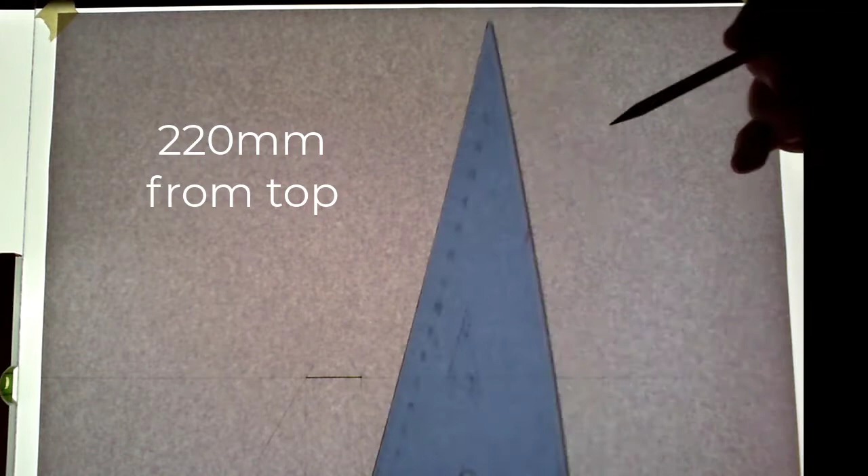So I started off by moving down 220 millimeters from the top of the sheet, and in 150 millimeters from the left hand side to this point here of the plan. Now each side on the hexagon is going to be 30 millimeters. So I drew in this line here 30 millimeters as part of the plan,

and I've drawn down a 60-degree angle and a 60-degree angle, and I've used a compass to strike off 30 millimeters and 30 millimeters. Okay, I then bring the 2 points down vertically, and then I strike again off the 30 millimeters and 30 millimeters. Okay, so that will give me the outline of the hexagon on plan, which I'm going to just finish drawing in.

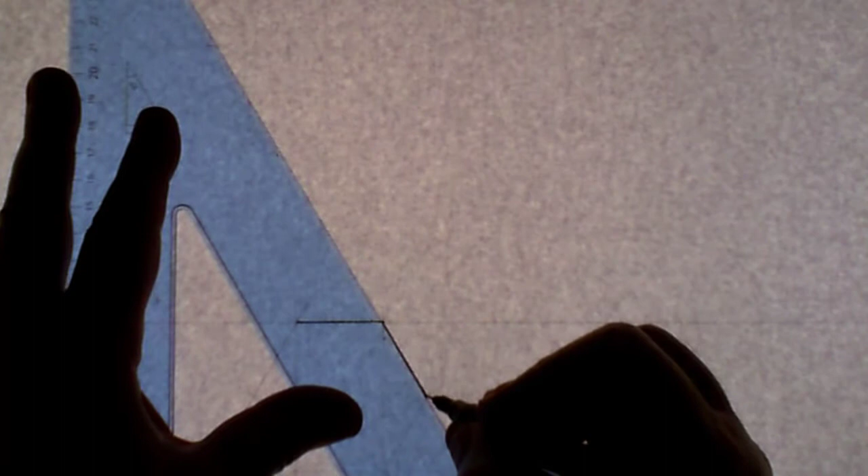So again, just to check that, so 1, 2, 3, all points correlating, 1, 2, and then 3. So a perfect hexagon drawn in there, and I'm going to now proceed to draw it in using ink. So what we have now is the hexagon on plan.

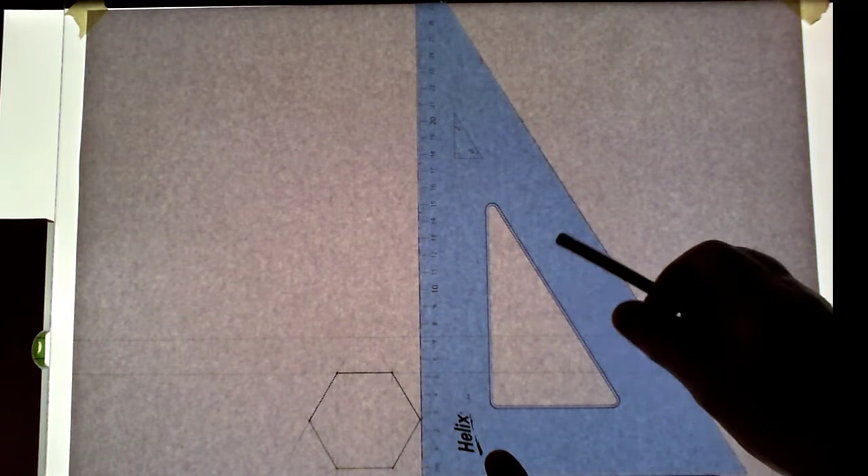So what I'm going to do now is I'm going to bring those points from plan up onto an elevation. So I'm going to space the XY line of the elevation, the ground line of the elevation, 20 millimeters above the plan. And I'm going to draw my XY line, the ground line of the elevation. I'm now going to proceed to bring up all of the points from the plan to form the elevation.

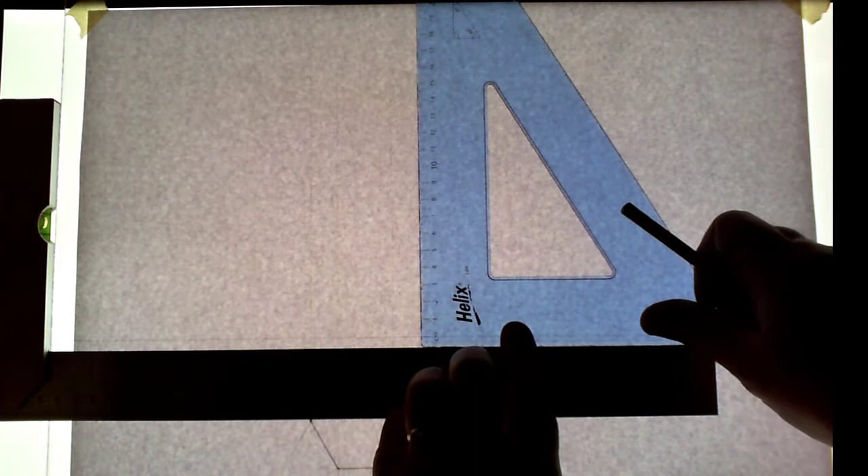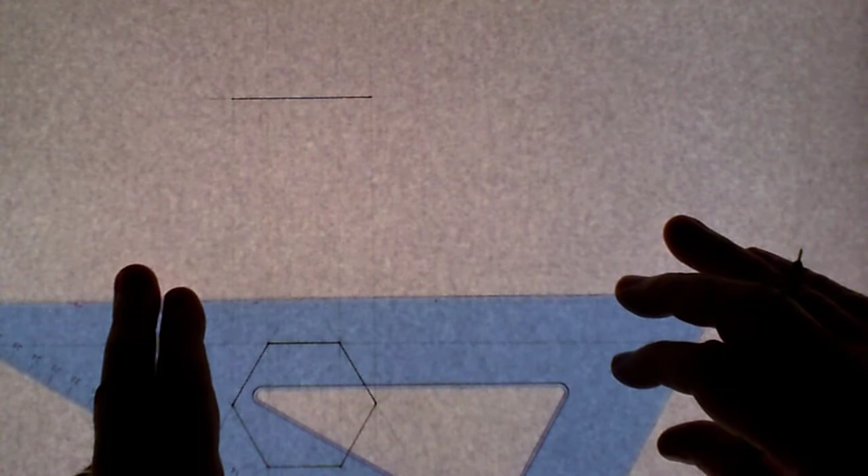Now the height of the hexagonal prism is 90 millimeters. Measure up 90, and I proceed to draw the top of the prism. Now I have the elevation drawn in now, and I'm going to ink it in. So the top of the elevation, bottom of the elevation, and the vertical lines of the elevation.

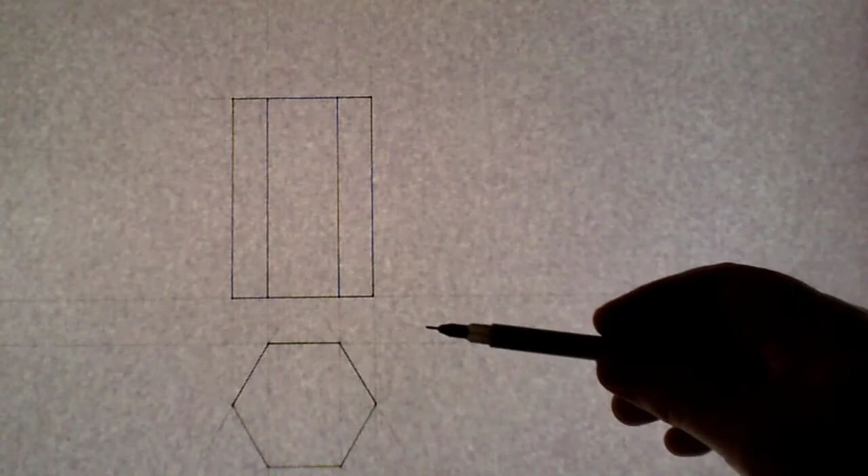So now we have the elevation and the plan of the hexagonal prism. Now what I'm going to proceed to do is to draw in the end views. So the end view on the right hand side will be looking in from the left. The end view on the left hand side will be looking in from the right. So I do that by simply drawing my points up at 45 degrees from the plan.

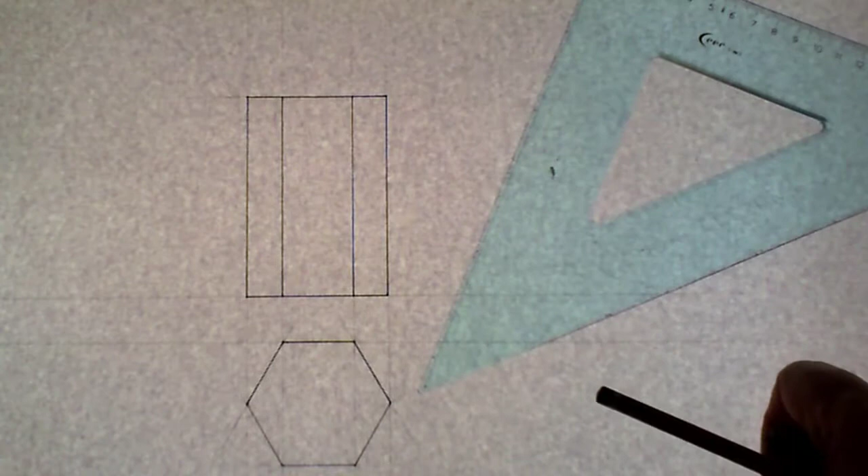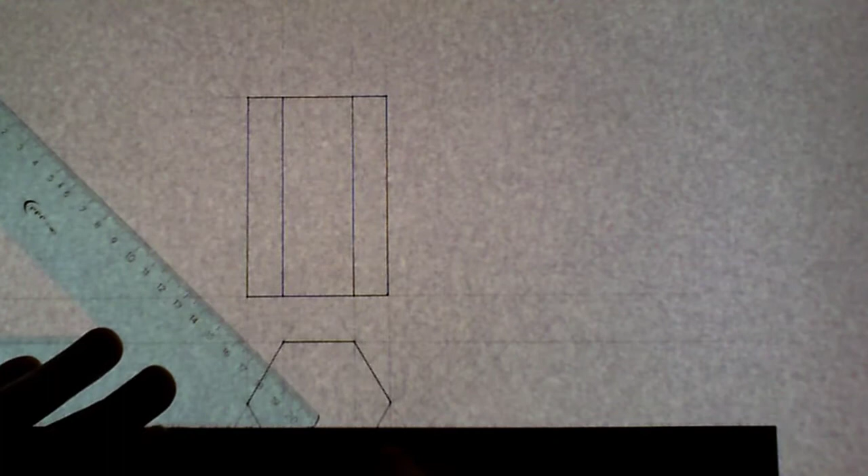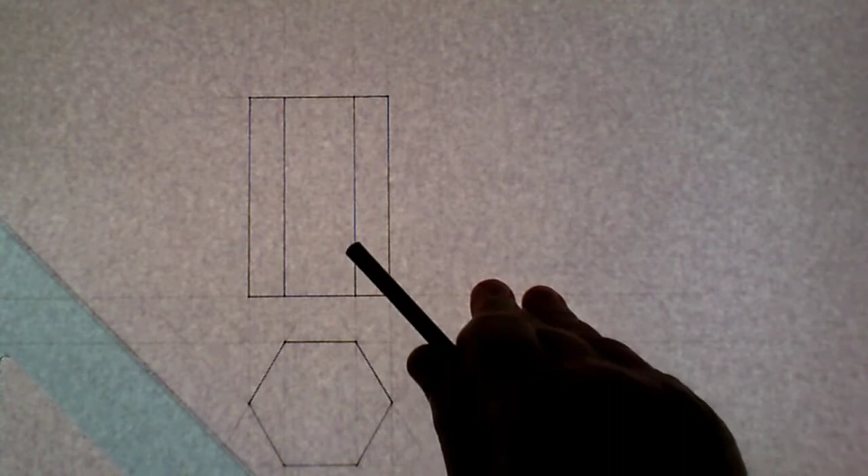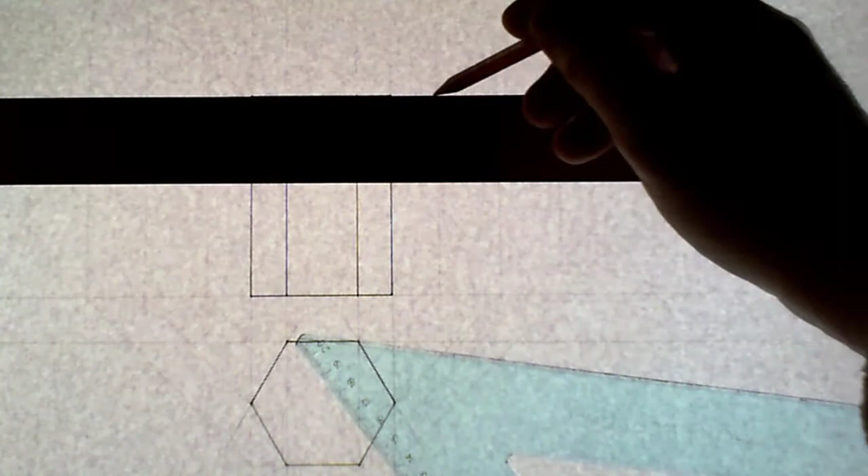Wrong point, that point there. Then extend those points up vertically for the side views. And I bring my height across from the elevation. Now, I'm going to proceed to draw in the construction lines in red.

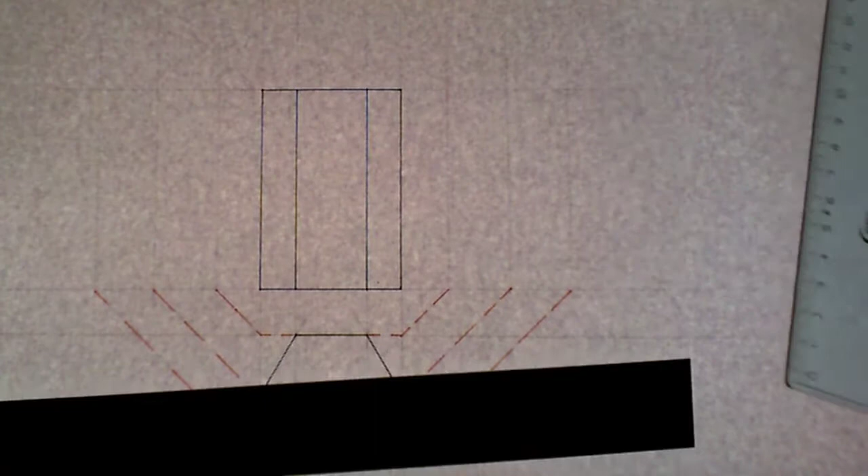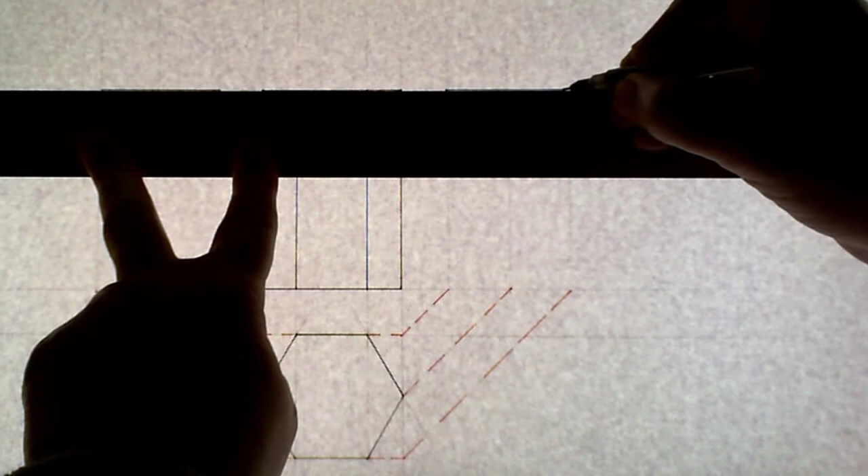Okay, so now I'm going to draw in the two end views. And now the vertical lines.

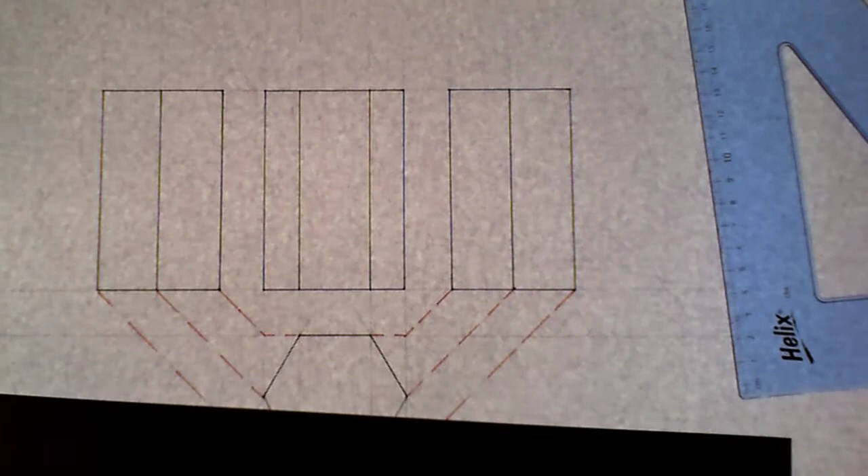So now what we have is the elevation, the plan, the end view looking in from the left hand side, and the end view looking in from the right hand side.

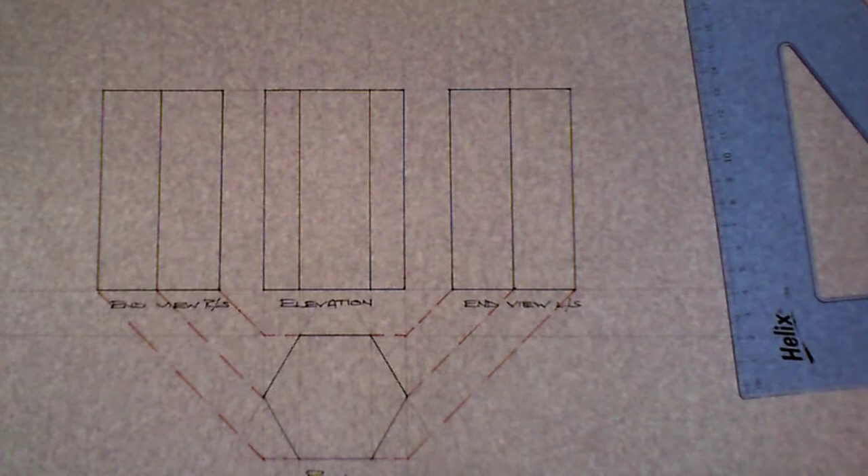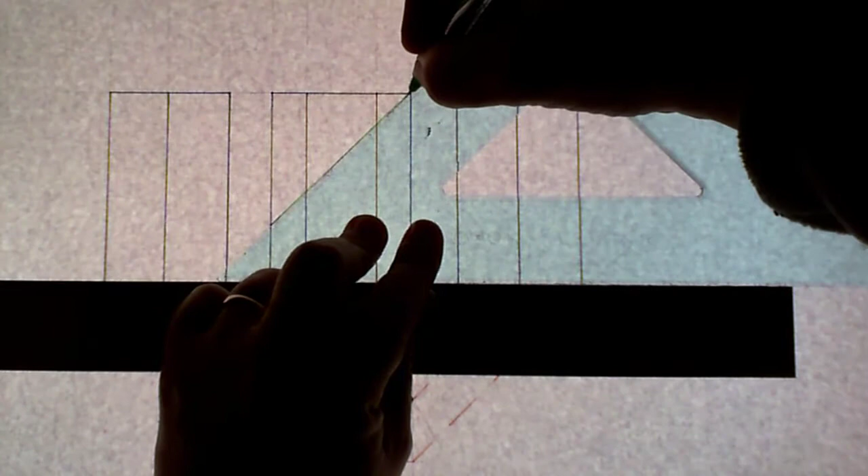Okay, so what we do next is insert a cut. So the cut that I'm going to insert will be at 45 degrees. And I'm going to move up 30 millimeters on the left hand side, and the cut will be at 45 degrees. So that's indicating the cut now.

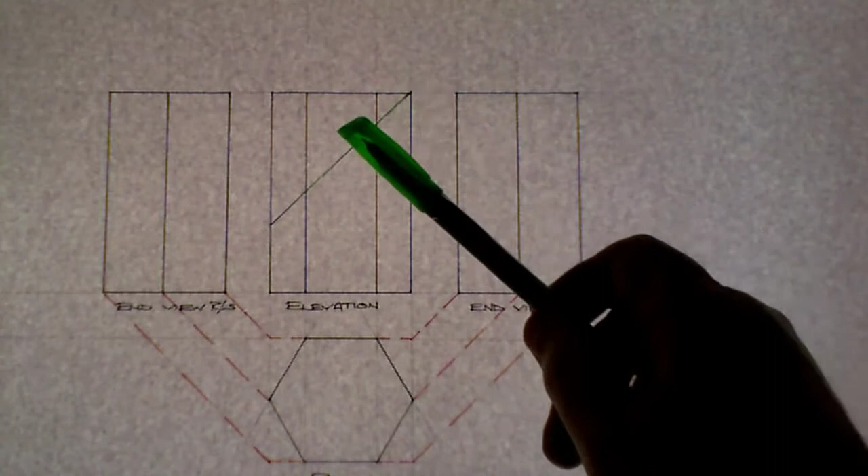Now, how does that cut impose itself on the other views? So first of all, with regards to the plan, it does not affect the plan because both points of the cut, the left hand side point and the top point, are on the sides. Okay, it does not cut through the top. So because these 2 points of the cut are on the sides, you have a full hexagon as a cut on plan.

So it doesn't impose any other line on the plan because the 2 extreme points of the cut go through the sides. However, it does affect the end views. So the points in the end view, if I bring the points across on the end view. So again, I'll just simply use a pencil first. So where that cut, that 45 degree line, cuts the different points.

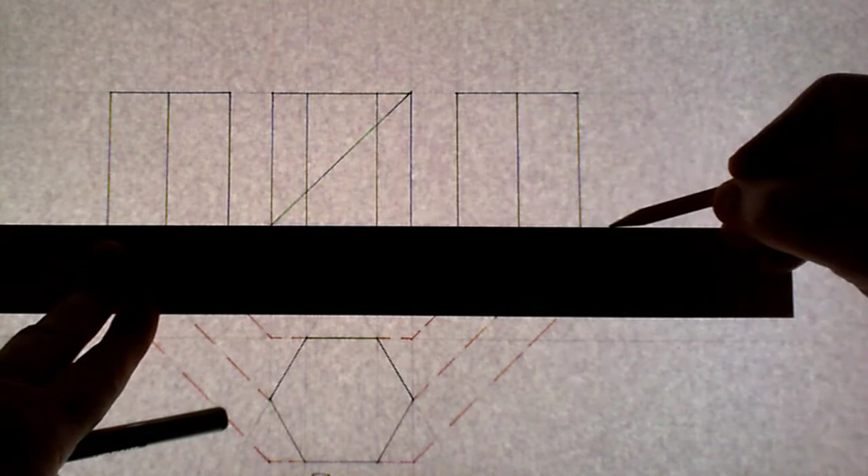So here, 1, 2, 3. Yeah, so I'm looking in this way. Okay, so the first point I see is this bottom point.

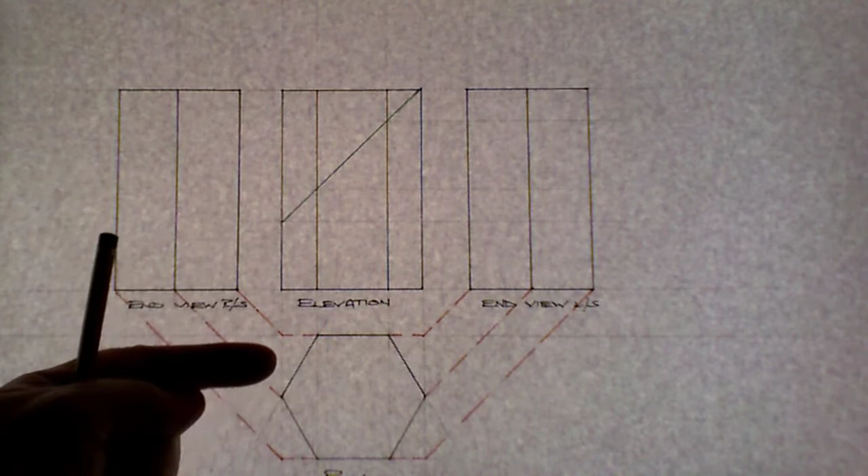Okay, so that's my first point, 1. Right? The next point is on these 2 points, the 2 sides. So it's here and here. The next one again is on the 2 sides, here and here. And then the top point, top corner, which is here.

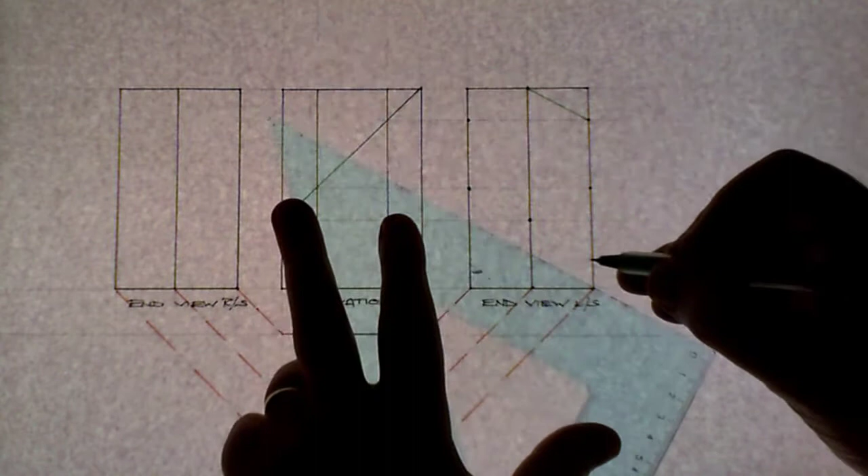So again, if I impose that as a cut, very simply draw it in, and they'll be hard lines because I'll be seeing the cut head on. So point to point here, 1, point to point here, point to point here, point to point here.

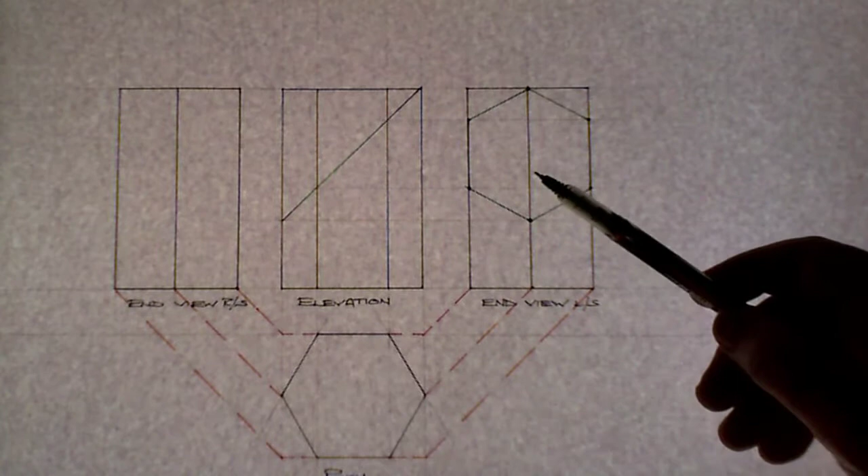So I just put the green line on the inside here just to indicate that this is the cut. So that's the cut on elevation. It doesn't affect the plan. You see the same shape with regards to the plan. The cut on the side view on the right hand side, which is looking in from the left, looking into the cut, the green line indicates here how the cut imposes itself on the end view.

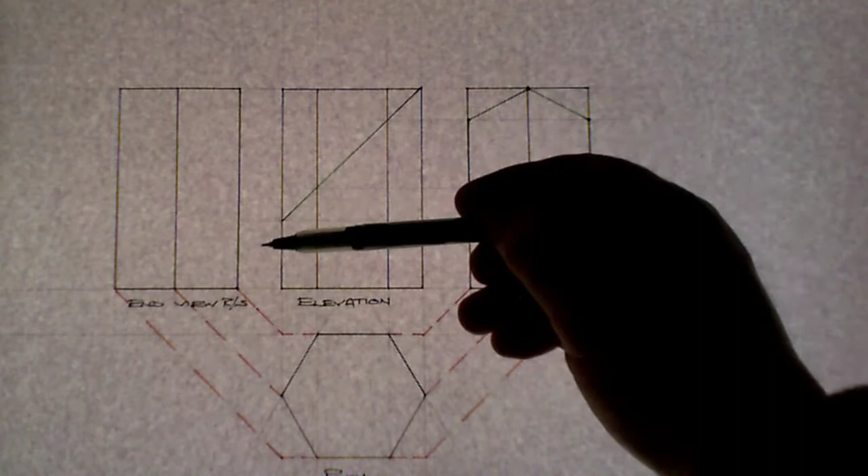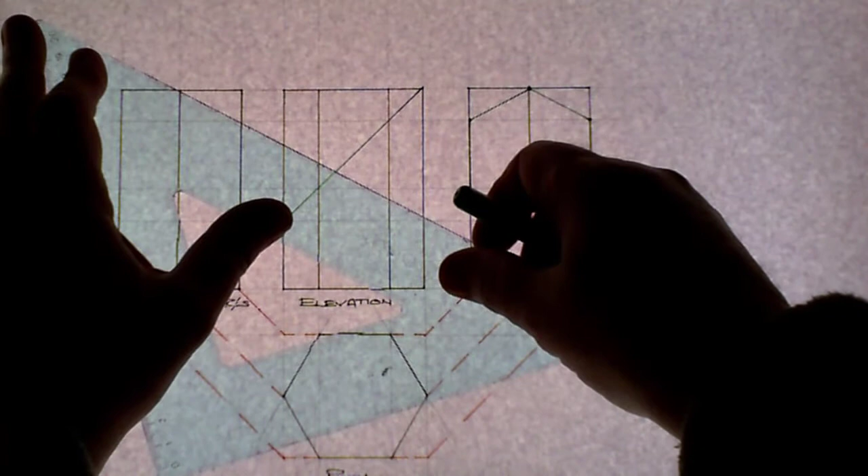Okay, on the other side, on the other end view, I'm looking in this way from the right hand side. Okay, so I'm not going to see the cut directly, but what I do is I pick up the points, bring them across and draw in the shape of the cut as a broken line. So again, I bring across the points of the cut. So again, instead of having a full hard line, what I do is I draw in a broken line. A broken line indicates what is there but you cannot see.

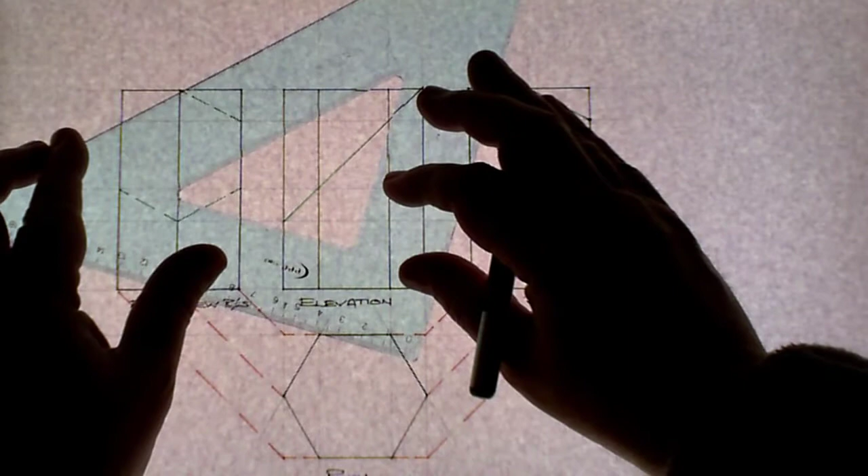Now, so we have the elevation, plan, end view looking in from the left hand side, end view looking in from the right hand side. Now I'm going to shade in the cut surface. So the green line is the cut surface. So on the plan, this is going to be the cut surface here. So I'm going to shade it in. And this is going to be the cut surface over here.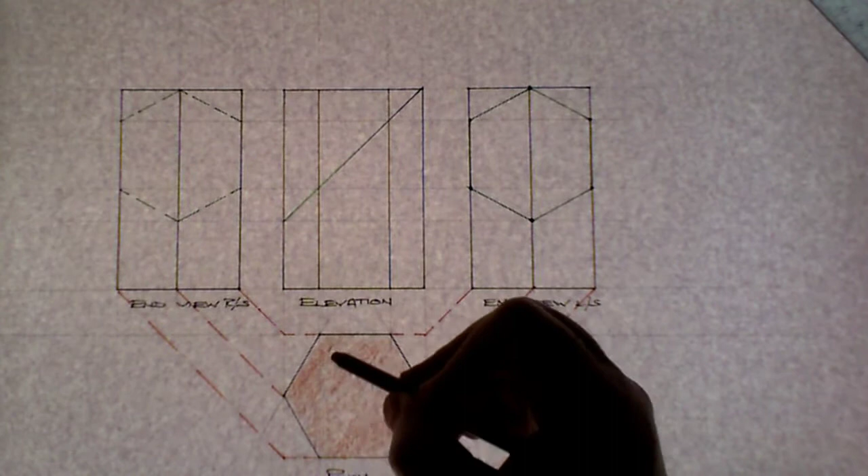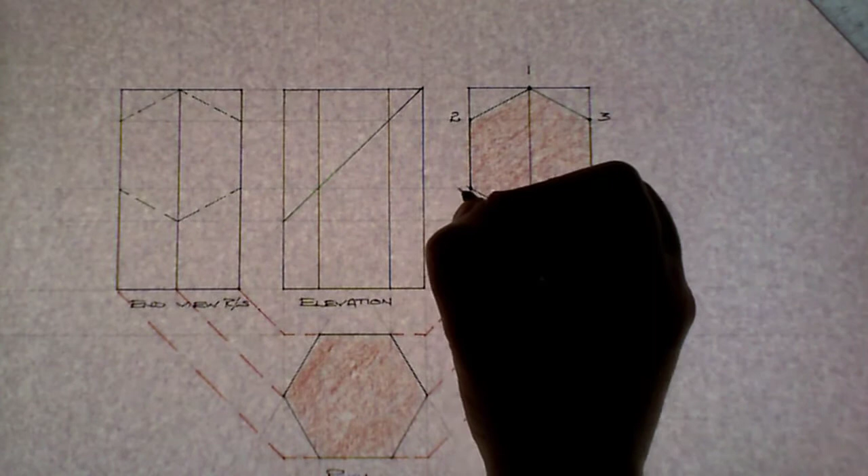So, the cut surface on plan, cut surface on elevation as a line, and cut surface on this side view looking in on the elevation from the left hand side. So the next thing I can do, just for clarity, I can index the different points. So very simply, if I index it on plan here, so I can list this as point 1, point 2, point 3, point 4, 5, and 6.

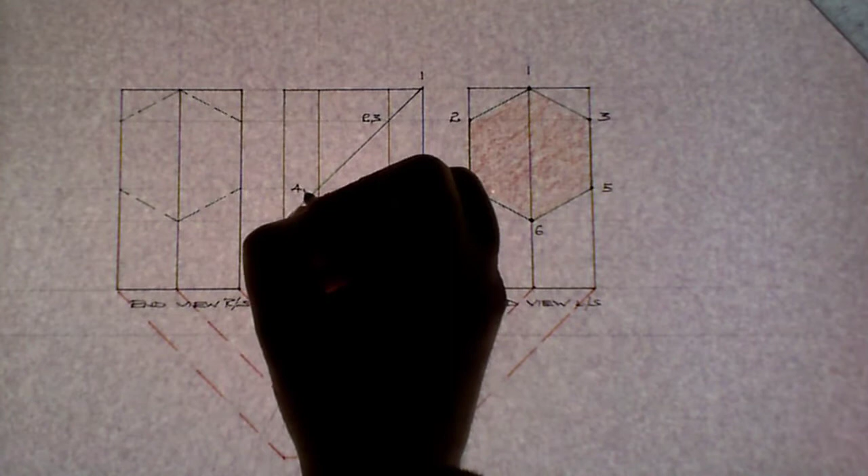Now again, if I'm looking at it in this instance here on the line, I have point 1 on the elevation, point 2 and 3 is the same point here, and then point 4 and point 5 is this point here, and point 6 is here. Now, on the plan, I have point 6, again looking at this here, I have point 4 and point 5, then I have point 2 and point 3, and then I have point 1. Okay, so that's the indexing done with regards to the elevation, the plan, and the end view on the right hand side looking in from the left.

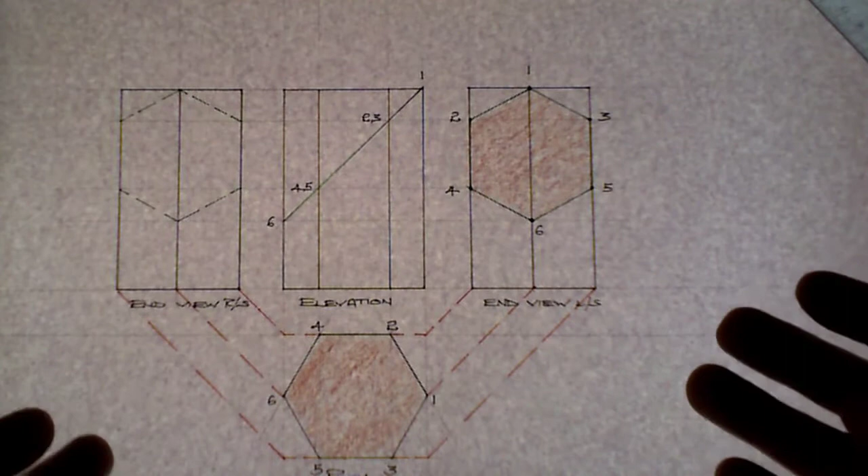Okay, now what I want to do is I can see how the cut has imposed itself on the different views, but what I have here with regards to the elevation, the plan, and the side view, I have the cut imposed, but I do not have the true shape of the cut. Now I can find out the true shape in a number of different ways. So I'm going to show you the different ways you can develop the true shape of the cut surface.

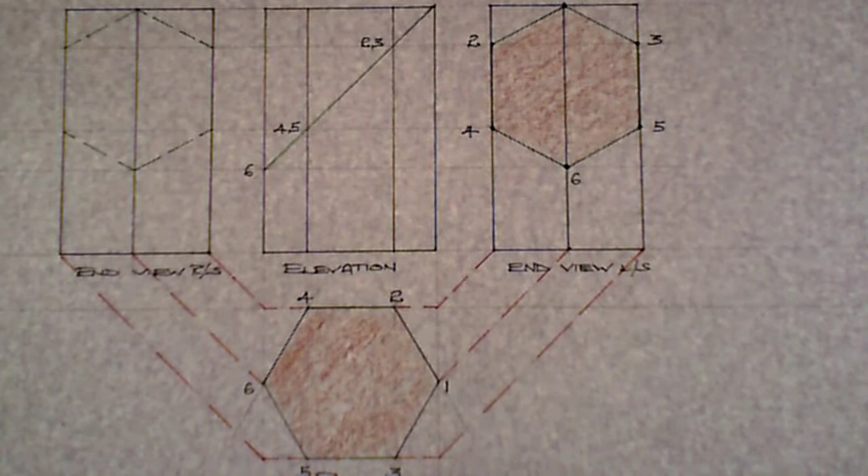First of all, first way of doing it, I know that the cut is at 45 degrees. Okay, so what I'm going to do very simply is draw a 45-degree line on this side here. So anywhere, I'm just going to impose a 45-degree line anywhere along here. So that's the 45-degree line. Now I'm going to draw that in red. Now what that line is going to represent, if I put that line in on plan, it represents this line here.

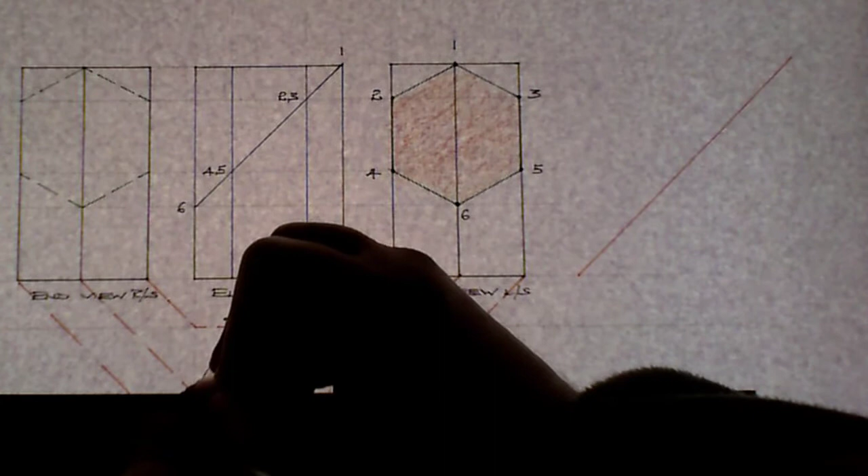It's a center line. Center line. And this here is going to be a center line. Okay? Now what I'm going to do is bring across the points. So I'm going to bring across the points to that 45-degree line, which I've just drawn in. So instead of using that, I'll use the set square, and I'm just going to bring across the points from the top of the view and use this point in order to keep it square, right?

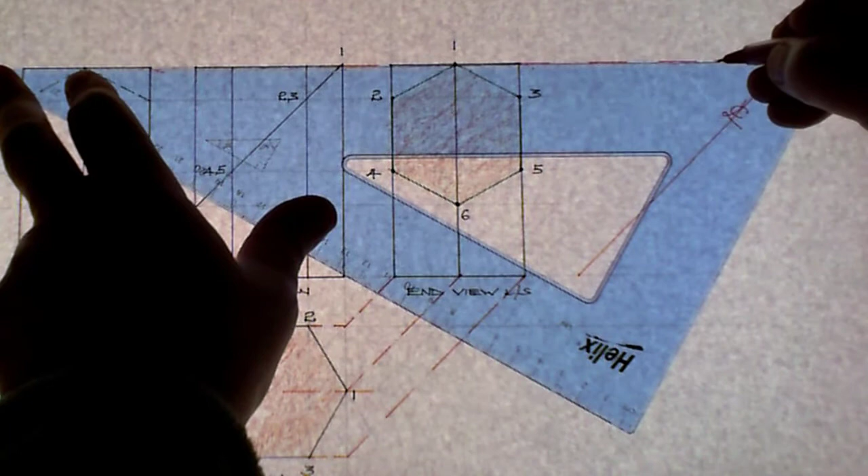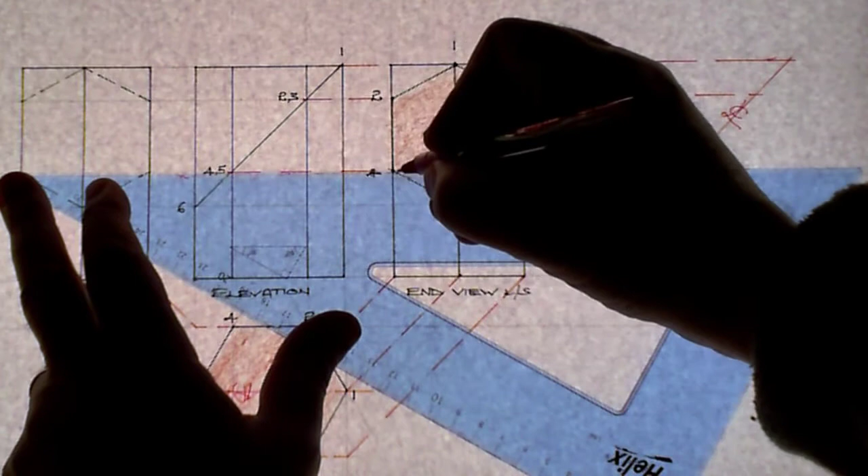So bring this point across, next one, next one, so I have each of those points, point 1, 2, 3, 4, 5 and 6 established on this center line here.

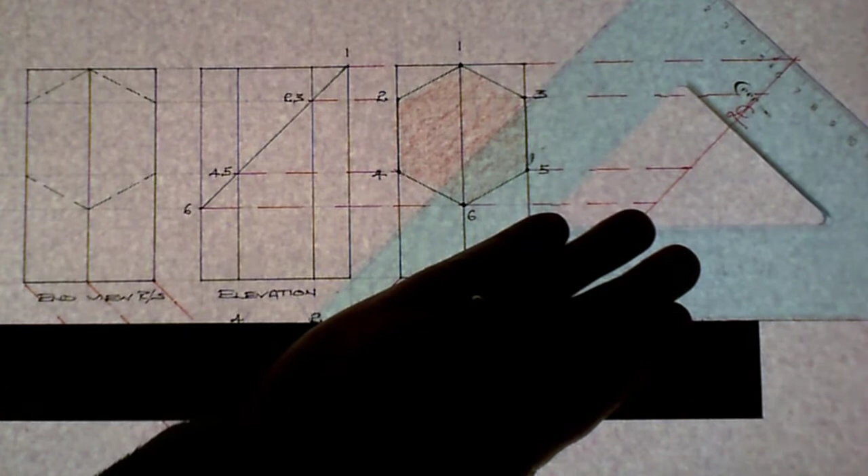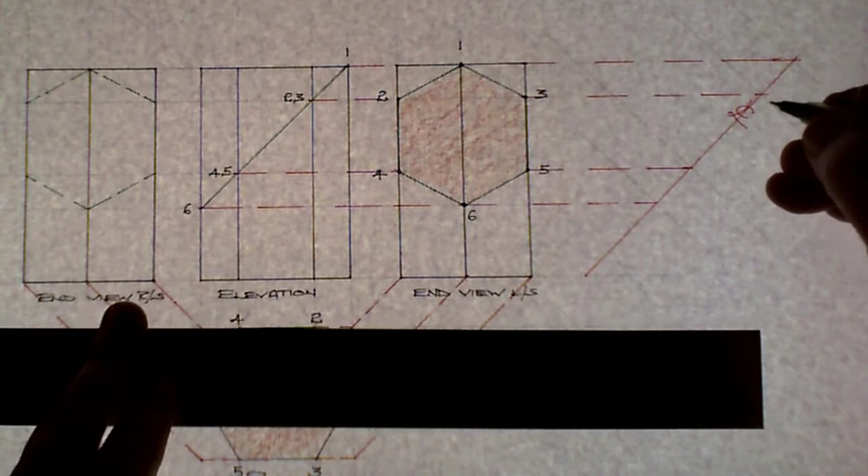Now what I'm going to do is draw a 90-degree line across from where those points hit the 45-degree line. So I'm going to use the pencil here. So top point, number 1, number 2 and 3, number 4 and 5, and number 6. Okay. So point 1 and point 6 will be on the center lines. This is the center line here on the plan.

The center line, if I put the center line in on the end view again, okay, I will use red. The center line is this line here. So that's the center line here. So I already have point 1 and point 6. They are on the center line. Point 1 and point 6. So I'll indicate that here, put it in green. Point 1 and point 6 are already established.

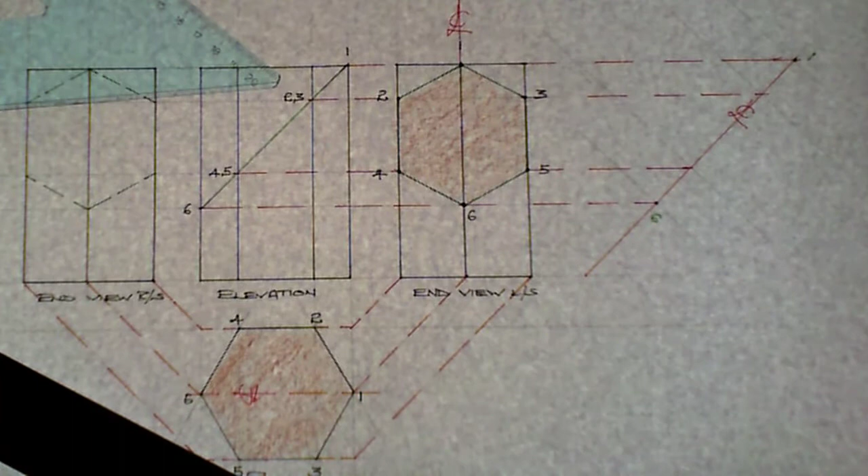Now what I'll do is simply get my widths. I can do it on both the plan and the end view. So the next point on the center line here, I put my compass, okay, and then I establish the width, right? These are the true widths on the end view, 2, 3, but it's also the same here on plan, same distance, 2, 3, center line, same. So I'm on the center line here, and I simply mark off what is going to be number 2 and number 3. Okay, it's the same width for center line to 4 and 5.

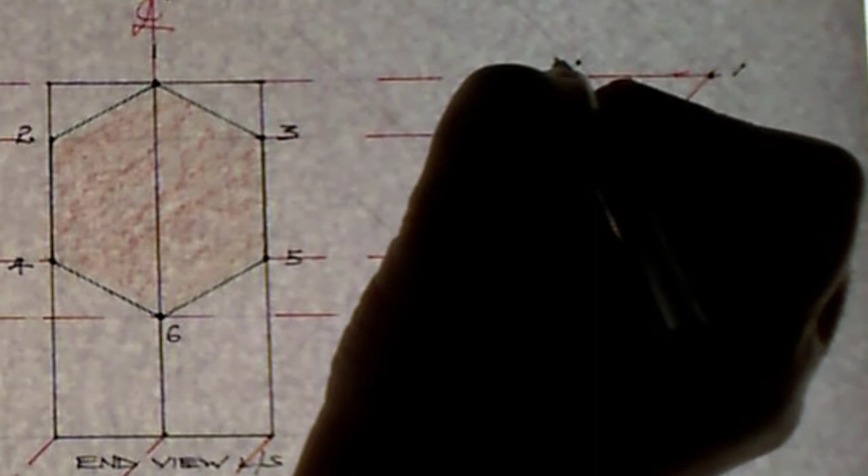Likewise on plan here, 4 and 5. Again, center line here, put it around, that's 4 and 5. So I'm going to mark those points again with a green marker. So again, I have two indicators here, point 2, point 3, point 4, and point 5. Now if I connect those points up, I have the true shape of the cut surface.

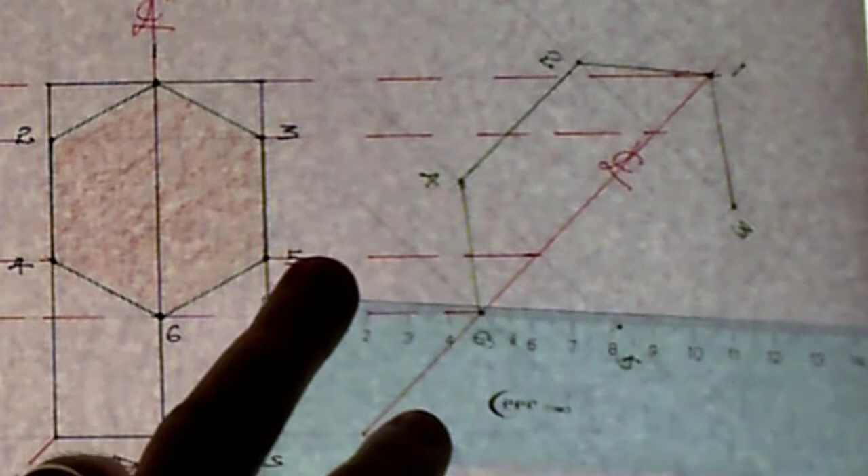So point 1, point 3 here. One to 2, 2 to 4, 4 to 6, 6 to 5, and 3 to 5. Okay, so that indicates now the true shape here, true shape of the cut surface.

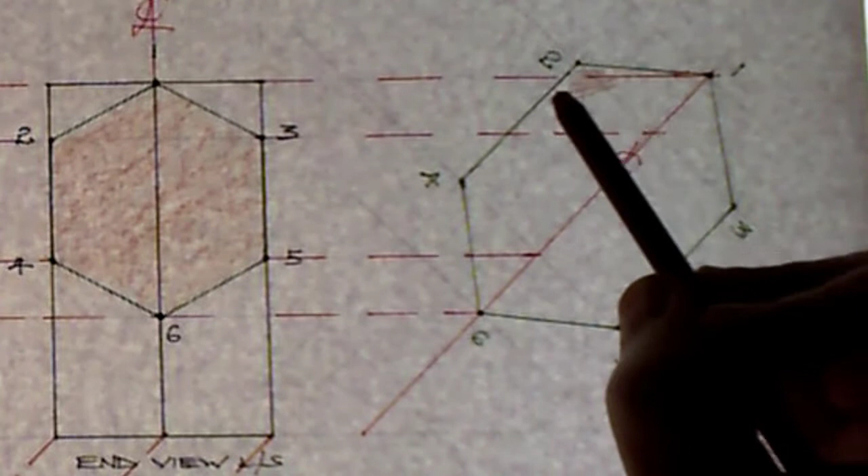So in effect what I'm using here is a swivel point. So on the cut surface I have the true length here on the elevation, okay, but I don't have on the side view or on the plan the true shape, because when I'm looking in at the end view I'm seeing this 45-degree inclined cut, but I'm looking at it on a vertical, not on the 45 as a true length.

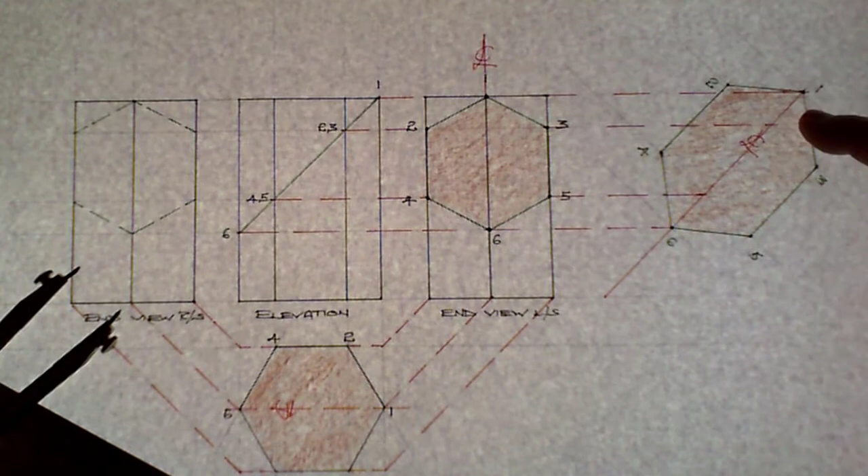So what I'm doing is I'm simply amalgamating two pieces of information. The true length line of the cut on the center line here, so that there is the true length of this line, okay, and I'm using then the true widths established from either the end view or the plan, and I'm bringing them off the center line and establishing my different points on the cut surface. So that's the true shape of the cut surface. That's one way of doing it.

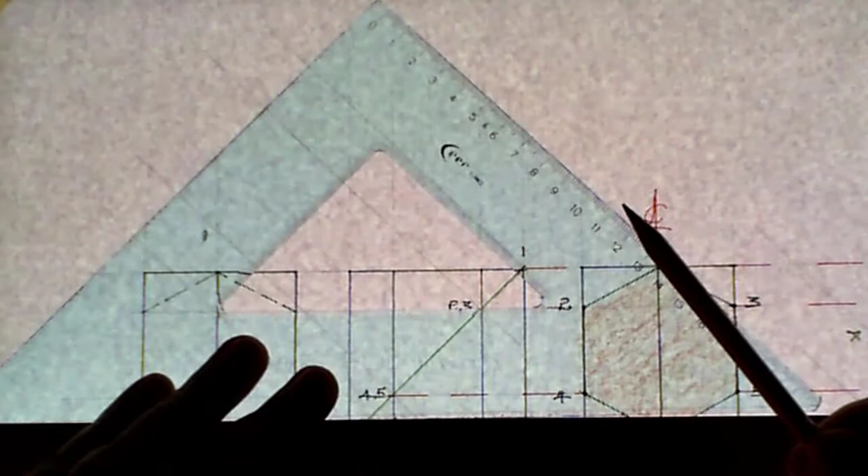Another way of doing it, again, simply what you're looking at is the 45-degree line here, because that's the angle of the cut. So in this instance, I'm simply going to bring off from the cut surface on elevation the points at 90 degrees to the cut surface. So that's just a simple return of 45 degrees. Okay. Now, in this instance, I'm putting the center line in a position whereby I can draw this comfortably and accurately.

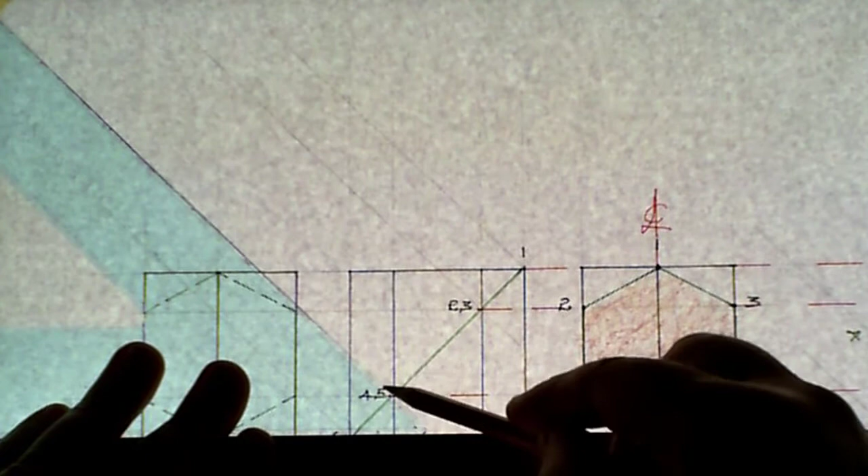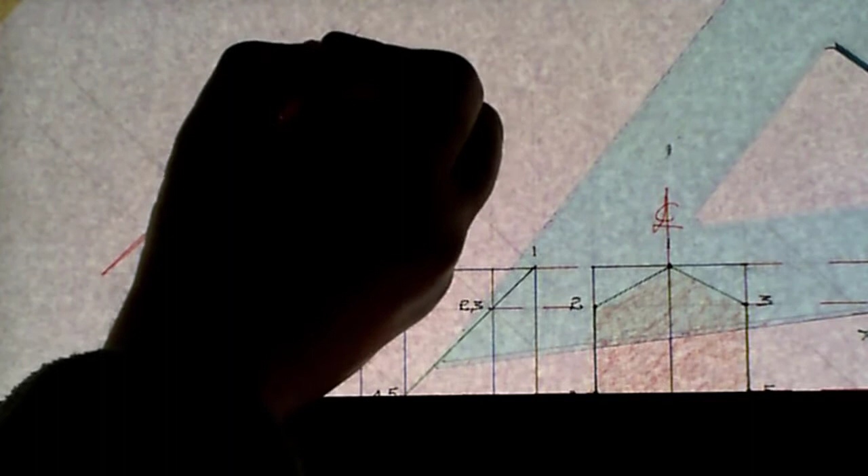Okay, so I draw again what's going to be my center line. I'm going to indicate this, again, in red. So that's at 45 degrees. It's going to run parallel with the cut. Okay, so that's my center line here. And on the center line, I already have established point 1 and point 6, because they are on the center line. This here is point 1, this here is point 6.

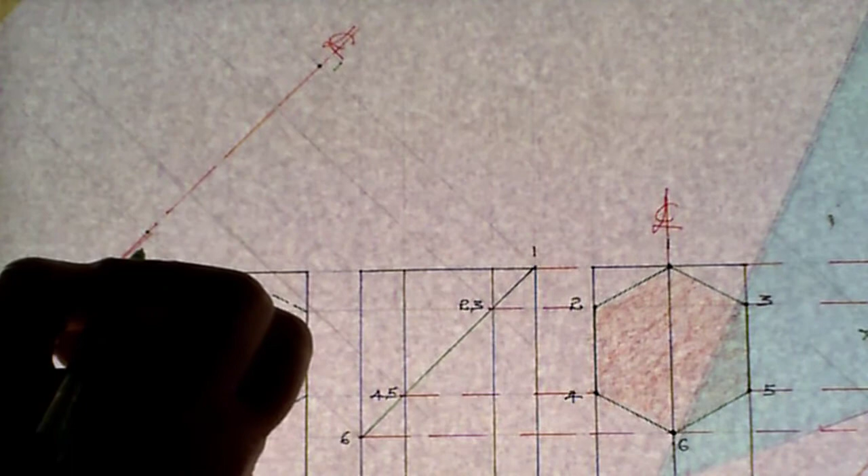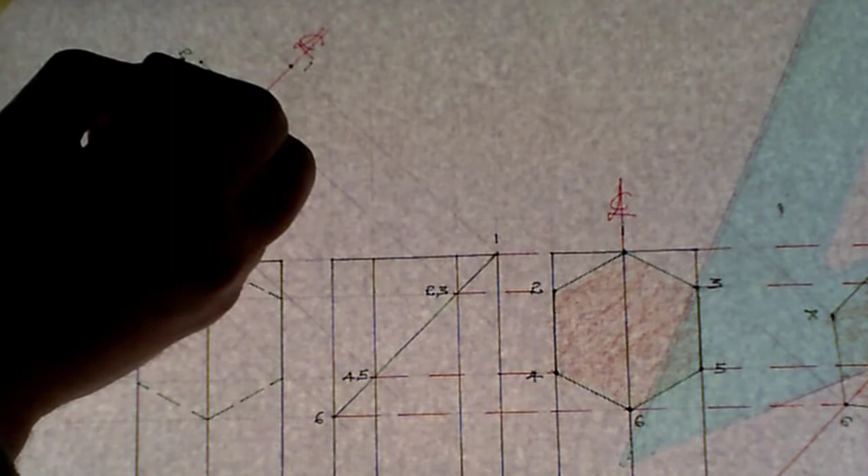Okay, now, again, what I simply do is I get the compass, establish the width from the center line, either from the plan or from the end view, and I go each side of the center line. Okay, now I can mark these points in likewise. So I have point 1, then point 2, then 3, and then you have 4 and 5. Now I simply connect those points again in order to establish the true shape of the cut surface.

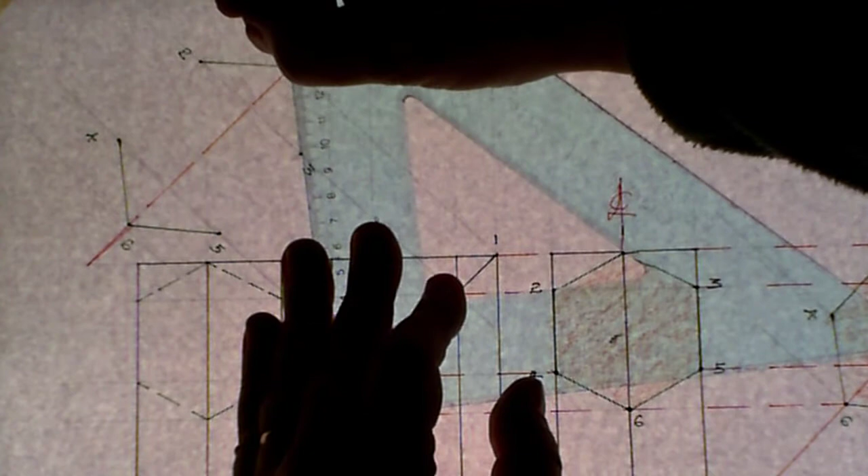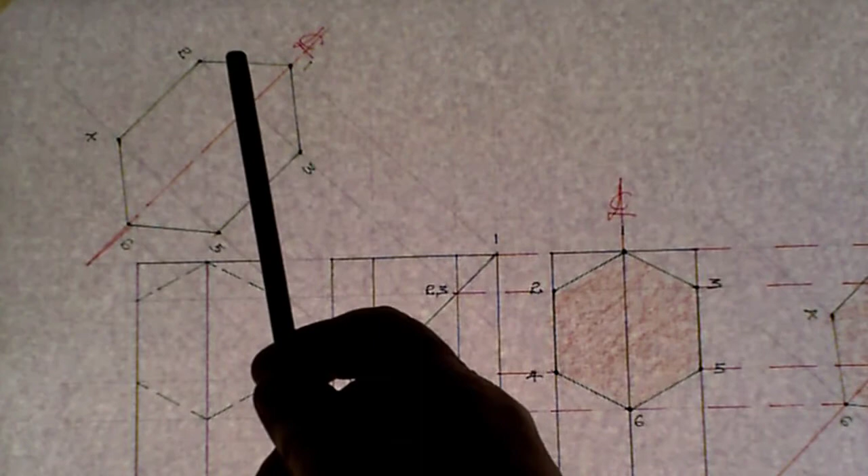So again, I have a true shape established over here of the cut surface. So this is identical to here. Okay. So true shape is established here. Now, there's point 6 here, and I'm simply going to extend that compass now from 6 to 1. Okay, and I'm going to pull that around onto the horizontal.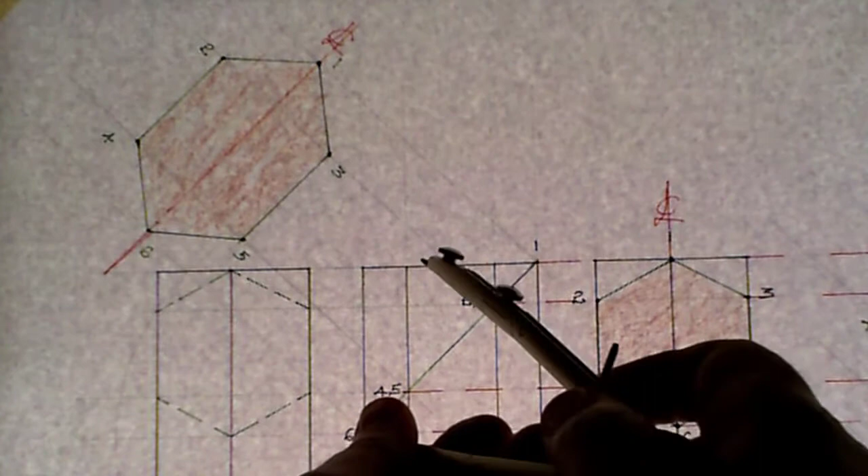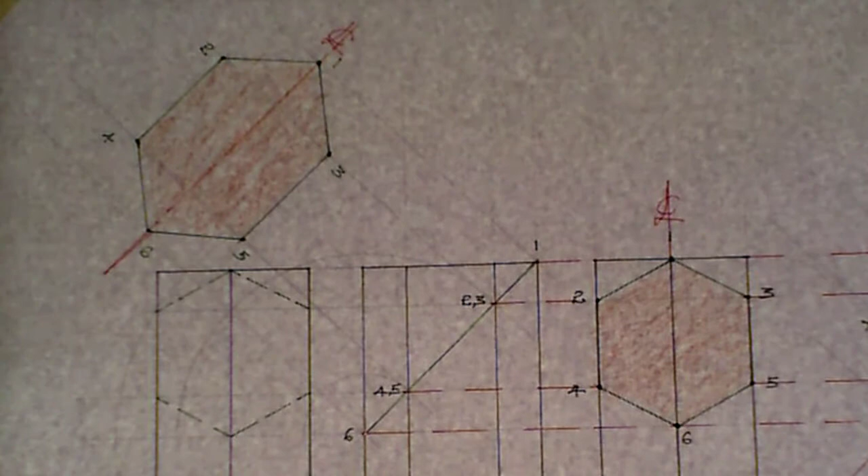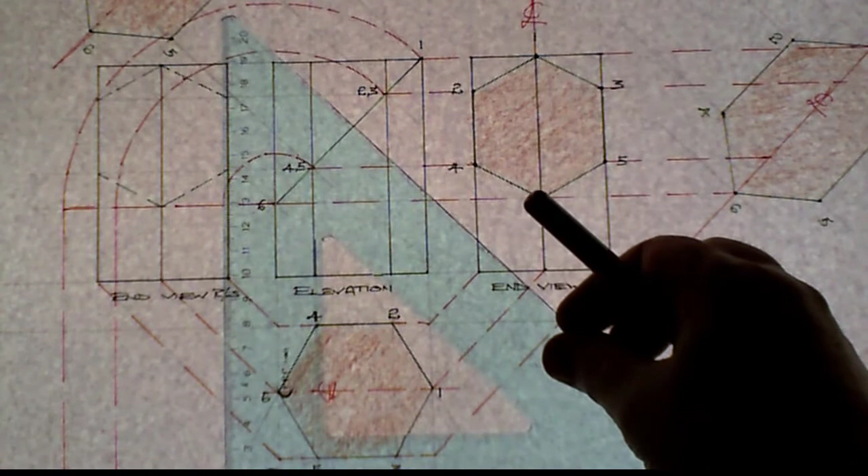Point 6 there, and then I bring those points down to the plan. Okay, and then I bring the same points out. Point 6 stays where it is, so points 4 and 2 brought out, and points 5 and 3 brought out. Now, if I index those, point 6 stays the same. Okay, so point 4 here, point 2. Now, point 1 to bring the center line out here.

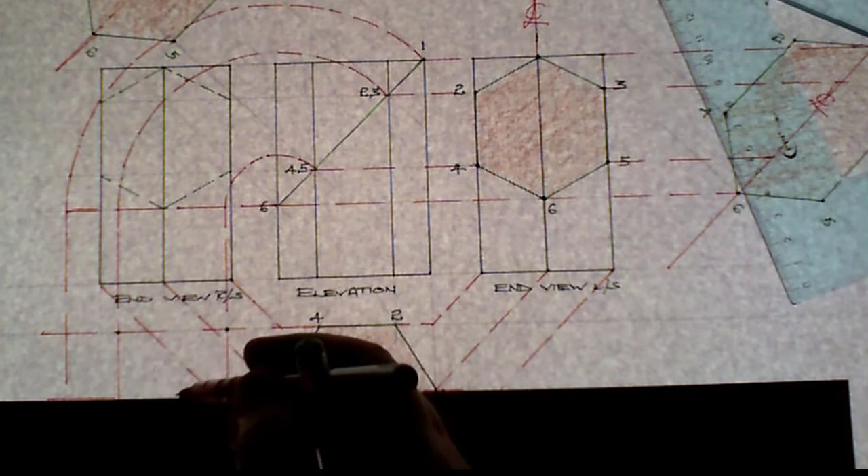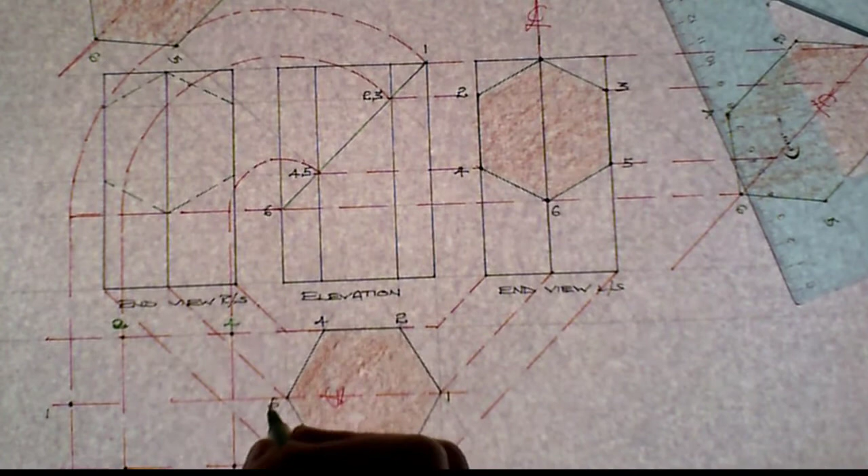Okay, so that's point 1. You're flipping it over. Then you have points 5 and 3. So if I index these now, you have point 1, you have point 4, 6, sorry, that's point 2. Point 2, point 4, point 6. Then you have point 1, point 3, point 5, and point 6.

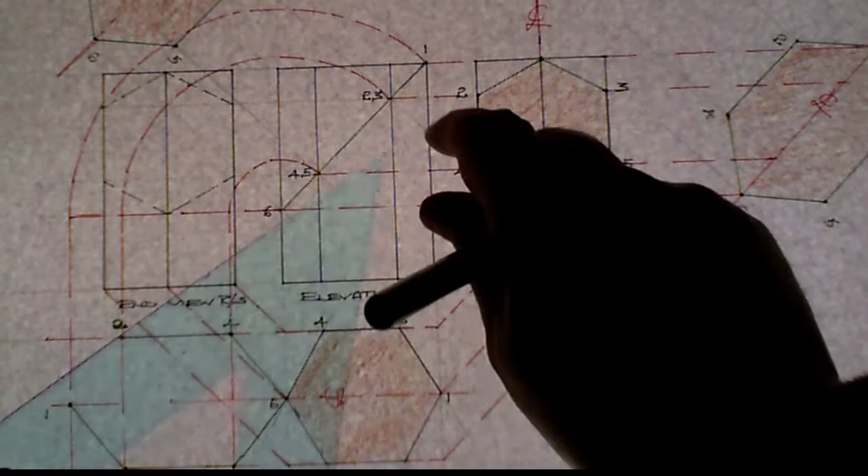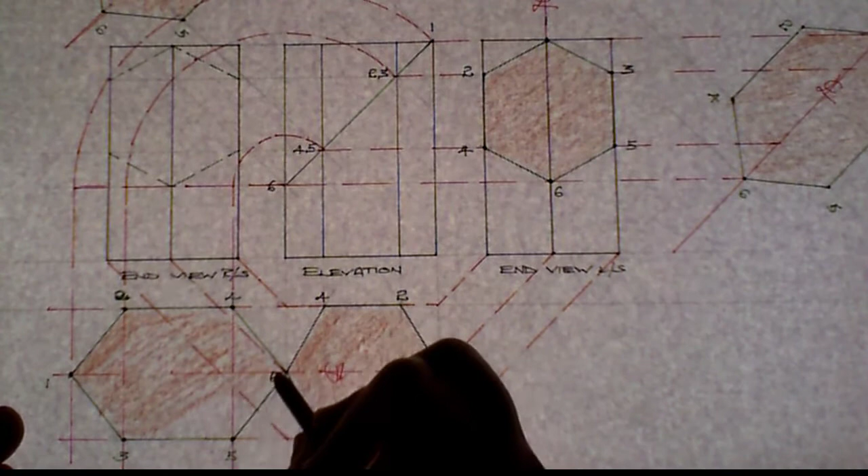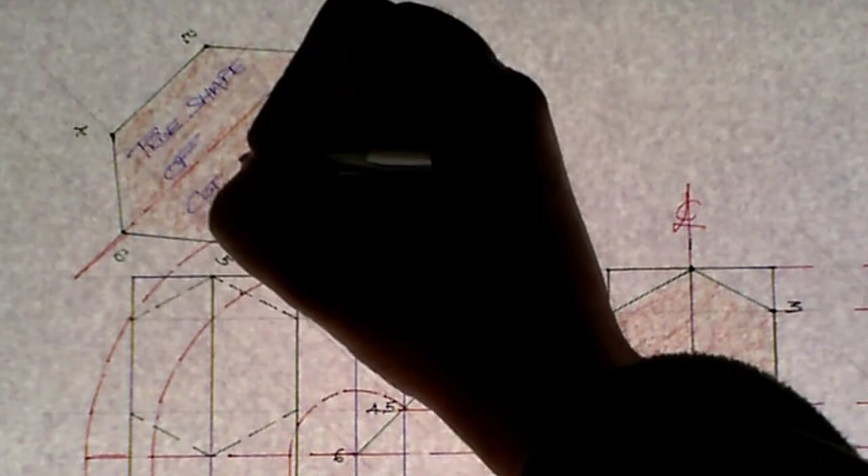Okay, this is the center line here. Okay, so this is the true shape of cut surface, and this is also the true shape of the cut surface. So now we have the elevation and the plan of a hexagonal prism cut at 45 degrees.

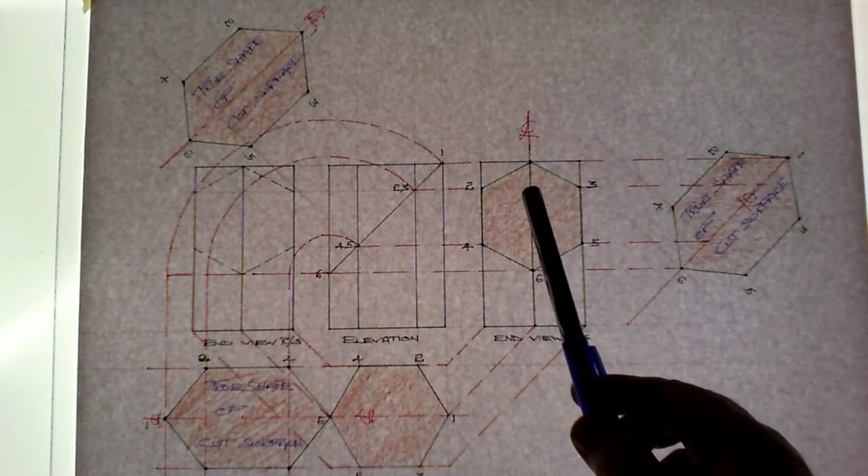You have the imposition of that cut shown on the end view here on the right, looking in from the left hand side. You have the broken line here indicating the cut as the imposition of the cut on the left hand side, looking in from the right. Then you have the plan drawn in, you have the indexing put in, you have the first way of drawing the true shape of the cut surface, because you cannot see the true shape on the elevation or on the end view.

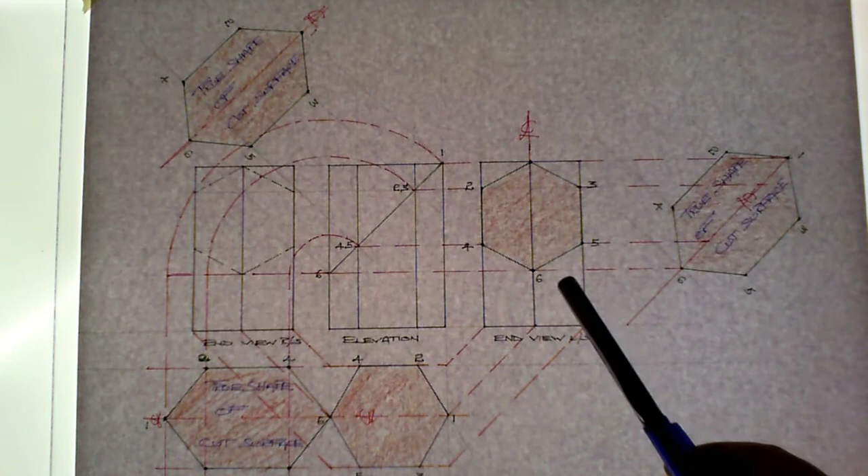So you have to show what the true shape is with the two pieces of information that you have. You've got the true length of the cut here, from point 1 to 6. That is a true length line of this line here. Okay, so you're using that information plus the true widths. The widths are true widths. So you've got the true length of 1 to 6, and then you've brought your points across the 45-degree line here, and you have the true widths in place. So that gives you the true shape of the cut surface.

Then the auxiliary one here is just simply bringing the points off the cut itself. Okay, a line running parallel to the cut at 45 degrees. That represents again the center line. And then you're simply getting your widths from either the side view or the plan, and you simply put your widths in place, index it, and you've got your true shape likewise here.

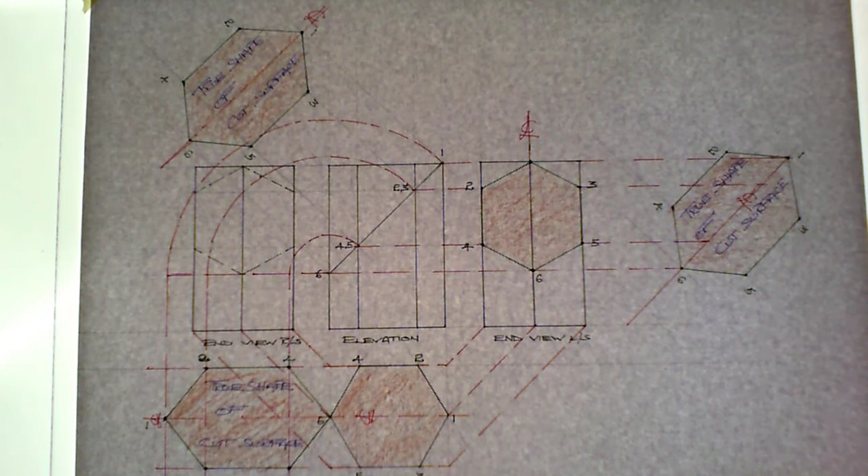The other way is to use a swivel point. So point 6 is a swivel point, and you simply bring points 1, 2, 3, 4, 5 around onto the horizontal, and then you bring those points down to the plan, bring the points across, and then simply index your points. So point 6 is the swivel point. Then you have point 4, point 5, point 2, point 3, and point 1. That again shows you the true shape of the cut surface.